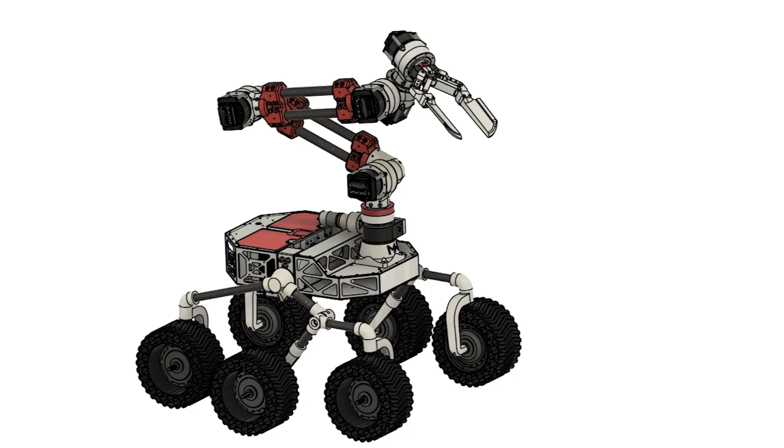Project MarsWorks was formed in 2017, attending competitions at the ERC in 2019 and the ARC in 2022. Our most recent project design cycle started in 2022 at the ARC, and we've been working for 3 years on our Scarab-1 rover. The Scarab-1 rover is a marvel at design and innovation from us at the University of Sheffield.

In 2017, the project was founded as Project MoonWorks. We looked to compete in the UK SEDS Lunar Rover competition. We came first for Best Innovation and second for Best Critical Design Review and Outreach.

In 2019, the team rebranded from Project MoonWorks to Project MarsWorks, and we made our first ever debut at the European Rover Challenge with 6 of the original MoonWorks members on board. Then COVID hit, and we didn't have access to our rover, so the team disbanded for the year. But we came back together in 2021 to make sure we could compete in the ARC 2022 competition.

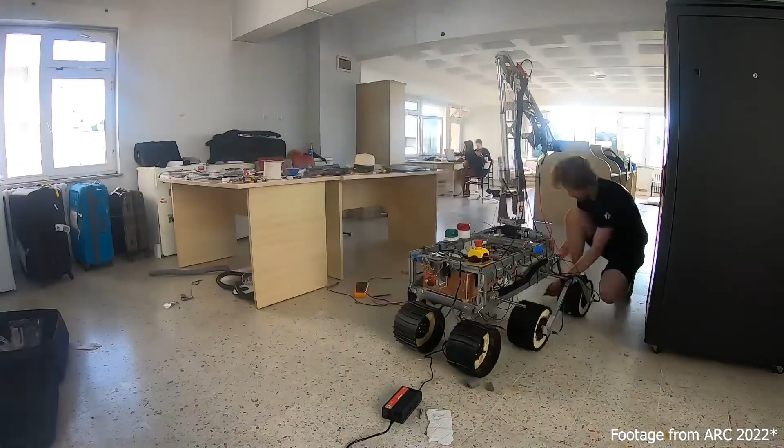In our team of over 50 members, we have a strict selection process for our astronaut training plan. We're looking for high meeting attendance, consistent, thorough project contributions. We're looking for good problem-solving skills with the adaptability and the ability to stay calm under pressure.

Once selected, each astronaut will undergo thorough training from all of our sub-team leads. This training will involve workshops, lectures, and meetings to go over the assembly process, subsystem design, priming for operation, and most importantly, failure modes and troubleshooting techniques. This will allow every astronaut to understand the rover completely and be prepared for any situation when getting the rover ready for all the challenges at the ARC.

As you can see here, we meet weekly at the Hicks building in room F20, where we discuss, overview, and look at every possible solution as a team to make the Scarab-1 the best rover it can be.

This is the George Porter building. As you can see, we have battery storage on the left here and waste disposal on the right. Going through these doors, each member has to sign in and out to ensure safety. We share this building with many other CCA teams, student-led projects. As you can see here, we share this room with another robotics team. This is where we have access to 3D printers, electronics equipment, nuts and bolts, and general assembly of the rover.

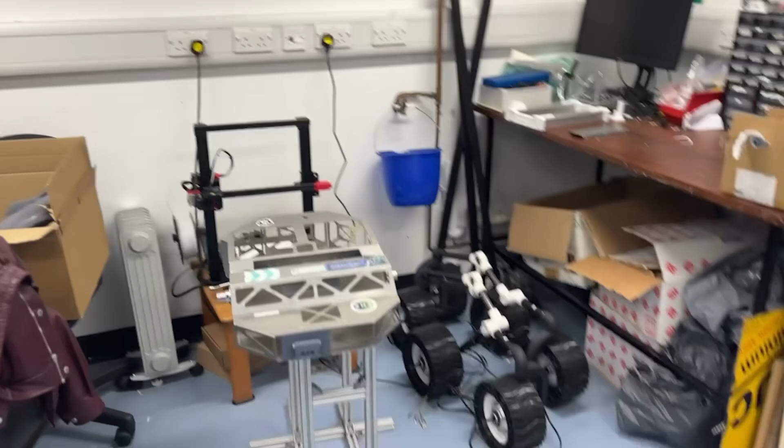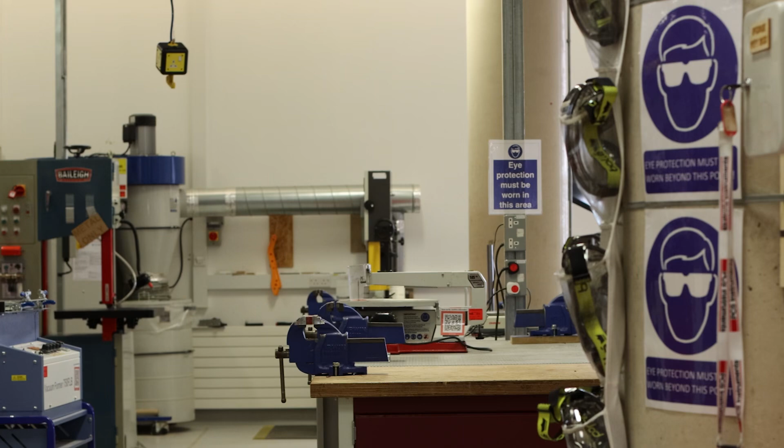This is the iForge. This is where the manufacture and machining of all our parts happens. In here, we have access to pillar drills, water jet cutters, laser cutters, mini mills, and many power tools, as well as more 3D printers and soldering equipment.

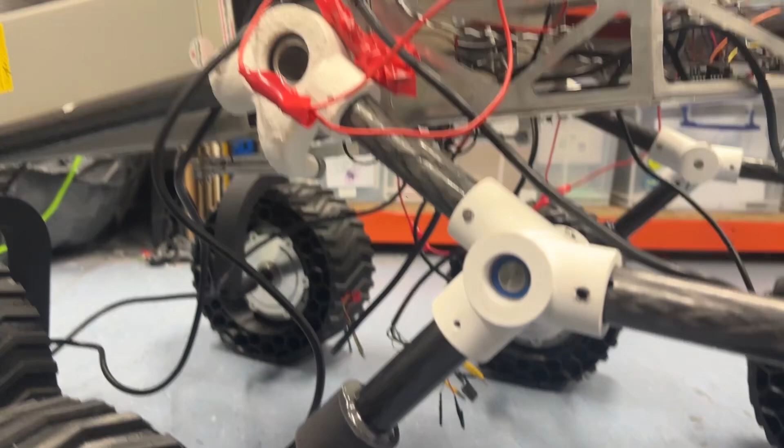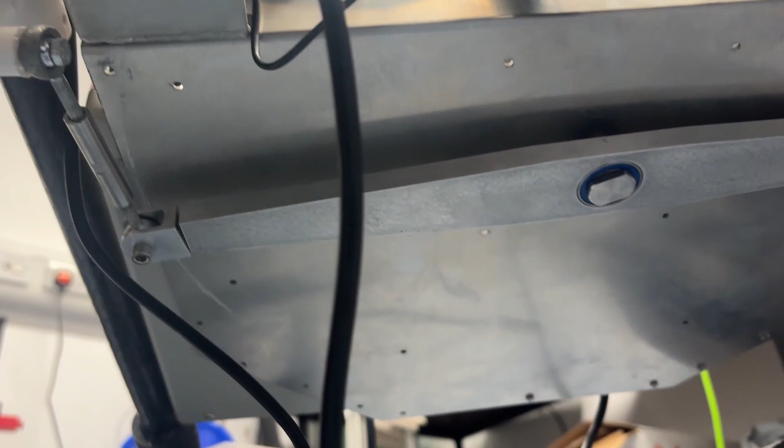The mobility system of the Scarab-1 features 6 independently powered e-bike motors driving TPU printed wheels. These e-bike motors have been internally welded to ensure the freewheel bearing is closed. It employs a rocker bogie suspension system where rocker arms are connected to bogie links and balanced by a differential bar. This ensures all wheels maintain ground contact on uneven terrain while keeping the chassis level. The system uses tank steering to allow forward motion, reversing, and turning.

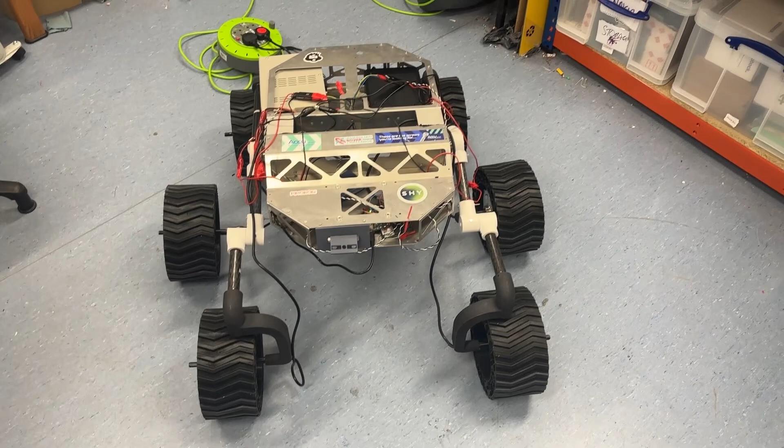With a total mass of 53 kilos and dimensions of 0.85 meters in width, 0.94 meters in length, and 0.5 meters in height, this design prioritizes stability and durability. Lightweight carbon fiber tubes and 3D printed PET-G connectors provide strength and keep weight low.

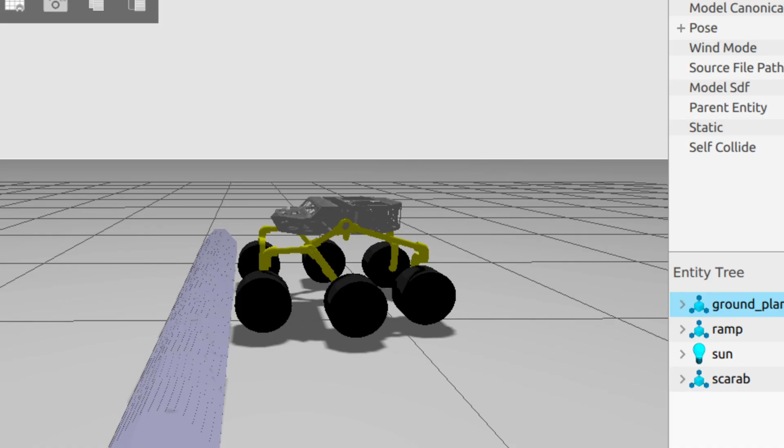Staggered wheel widths and over-wheel motor supports enhance stability and ensure the suspension is stable under a huge variety of scenarios. This robust design ensures reliable operation across challenging planetary surfaces, including steep gradients, craters, and large rocks, all to be expected when carrying out the ARC mission objectives.

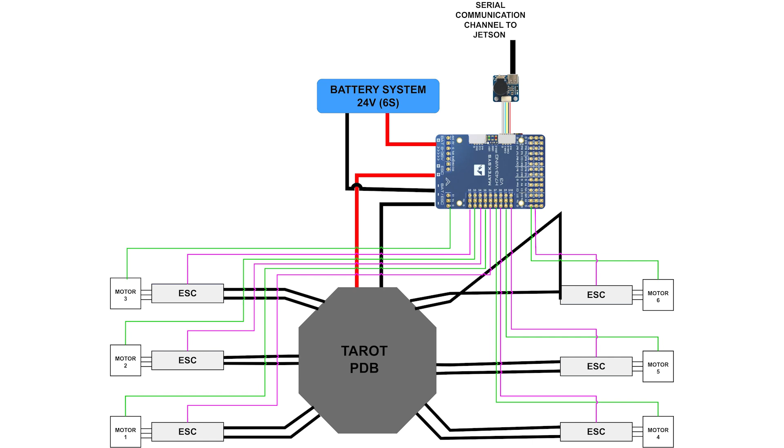The Scarab-1's electronic system is powered by 7 GNB 7000 mAh LiPo batteries with a combined theoretical runtime of 2 hours under full load. Each battery weighs approximately 800 grams. Power is distributed through a Tarot high current 480 amp power distribution board that supplies energy to the motors via the ESCs. Each ESC will be mounted to the chassis as an effective heat sink, and the entire chassis is connected to the system ground for a safe electrostatic discharge pathway.

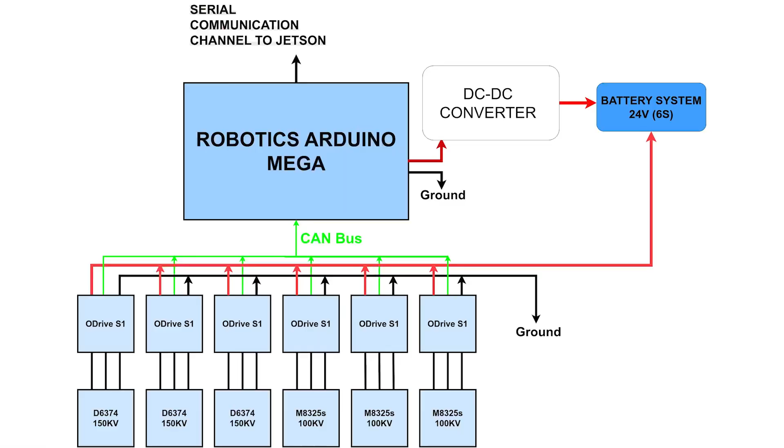The electronics architecture employs an NVIDIA Jetson Nano as the master controller, supported by Matek H743 Wing V3 flight controller and Arduino Mega boards as slave devices. The NVIDIA Jetson Nano provides 472 gigaflops of AI processing power with its quad-core CPU running at 1.43 GHz and a 128-core Maxwell GPU operating at 921 MHz.

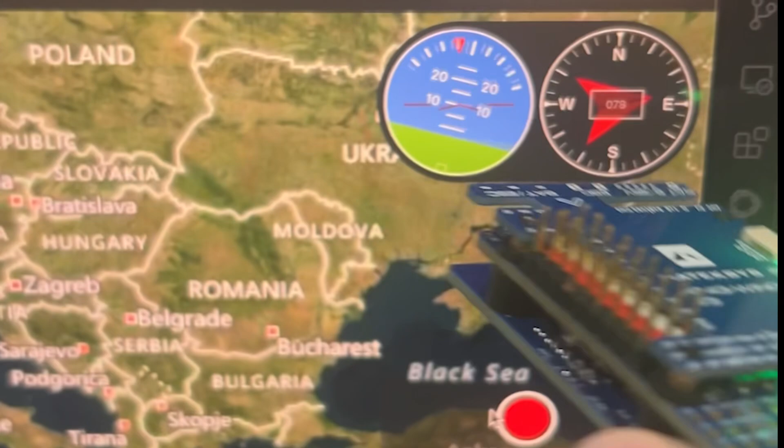This enables real-time processing for autonomous navigation and sensor integration. The Matek flight controller features an MCU running at 480 MHz with dual IMUs for precise motor control. It includes 7 UART ports, CAN bus support, and integrated battery monitoring.

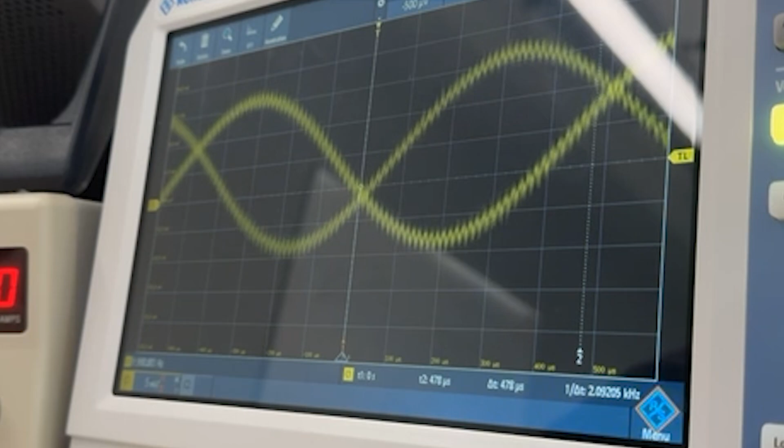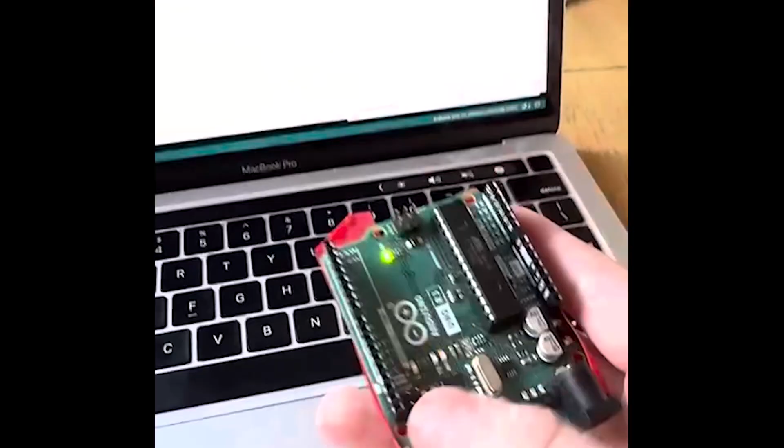This will be used in conjunction with the Jetson to control the speed of the rover. This is done via PWM signal control of our 6 ESCs to provide forward, reverse, and turn capability. To ensure modularity and ease of maintenance, the XT90 and XT60 connectors are used extensively for subsystem connections.

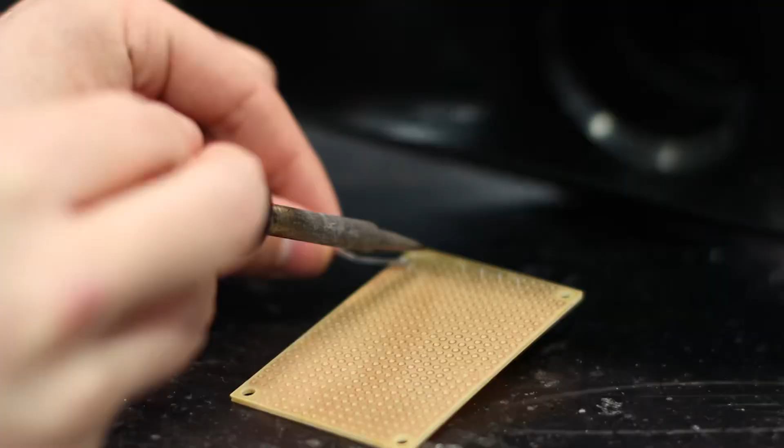Real-time battery monitoring provides critical data via telemetry to the ground station for operational safety. All supporting architecture, excluding the batteries, will come to just less than a kilogram. The combined theoretical runtime of the 7 batteries comes to a total of 2 hours, which gives us ample time to compete in even the longest mission in the ARC 2025.

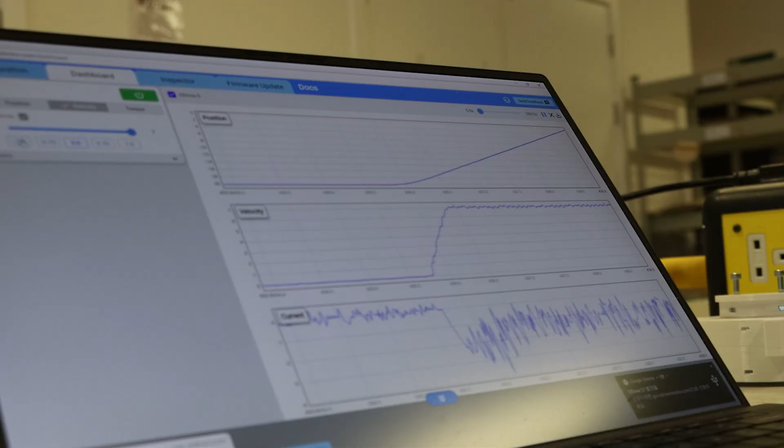The Scarab 1's manipulation system includes a modular 6-degree of freedom robotic arm powered by BLDC motors with ODrive S1 drivers. Each joint communicates via CAN bus for distributed control and easy maintenance. ROS2 integration with MoveIt2 enables real-time trajectory planning and inverse kinematics for precise operation.

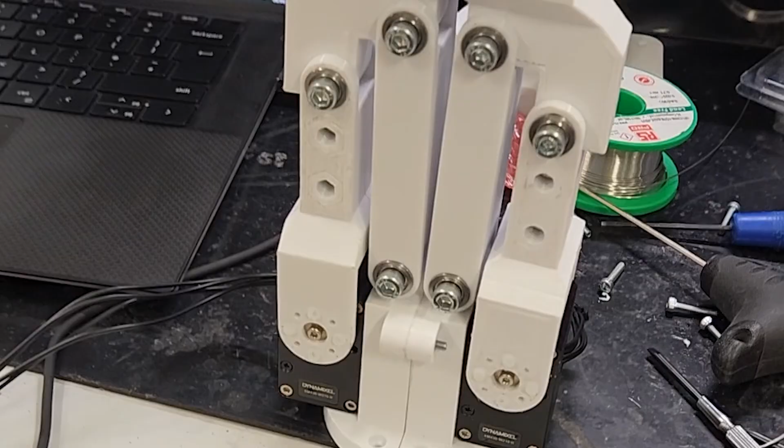The arm's custom-designed 64-to-1 roller wave gearbox delivers high torque at low cost while maintaining precision. At the end effector, Dynamixel actuators provide adaptable gripping capabilities with interchangeable fingertip modules. This modular design enhances maintainability and ensures adaptability for diverse mission tasks.

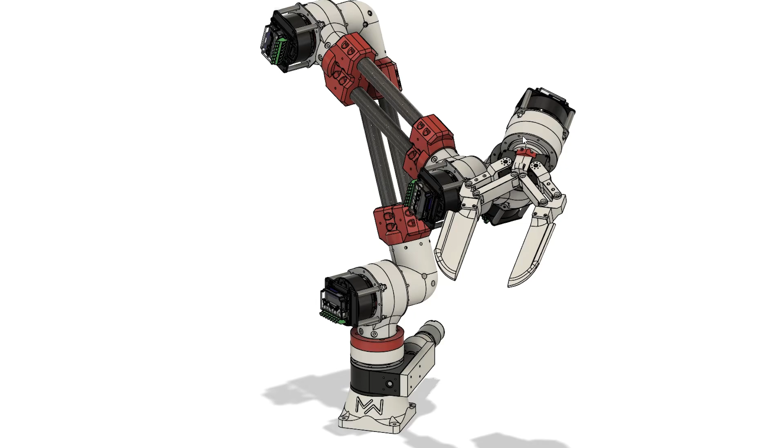This custom-made end effector outperformed the other design iterations in tests such as gripping and pulling, twisting and pushing. This ensures that the rover will be able to manipulate the environment around it and complete every task of the ARC 2025. For example, pulling the water ice subsurface extractor and manipulating the panel for the collaboration mission.

With a total reach of 1.2 meters and a foldaway height of around 50 centimeters, the total weight of the robotic arm is 12 kilos. The science payload features an auger drill sampling system mounted on the robotic arm to allow customizable sampling locations for optimal soil collection.

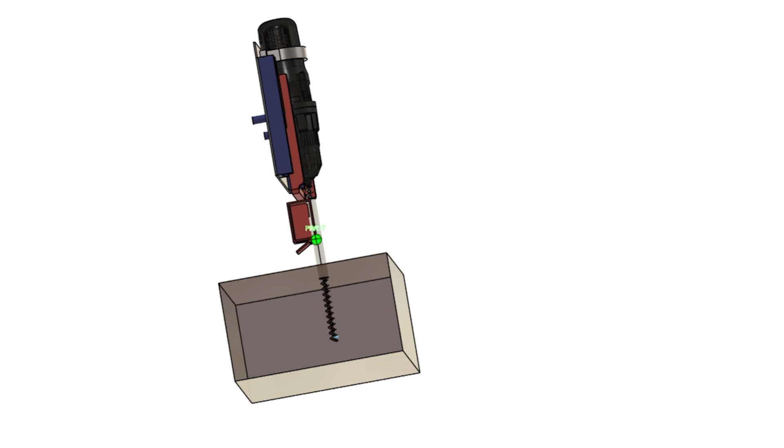The auger drill pulls samples through the sheath into a servo-controlled temporary sample box that discards the first 5 centimeters of soil to avoid contamination before depositing it into the dual science box. The auger drill can be seen here, pulling regolith up through the sheath, providing a sample. The use of the robotic arm allows multiple samples to be taken, ensuring a minimum of 5 grams of regolith is taken.

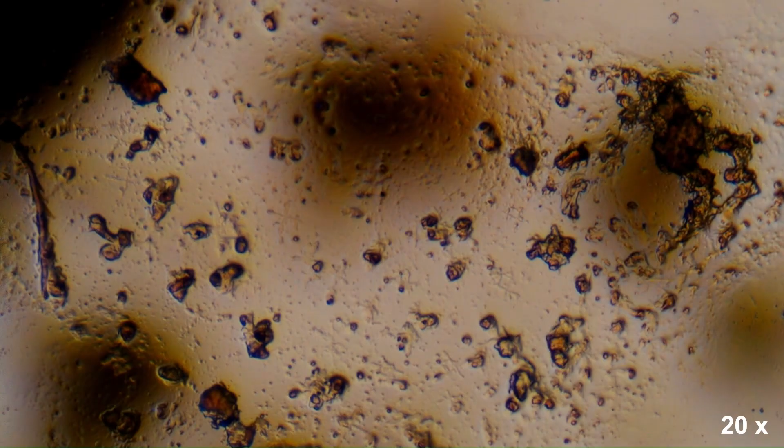Once collected, the soil is exposed to 465 nanometers blue light, which excites flavin adenine dinucleotide, FAD, a metabolic biomarker, causing autofluorescence at 530 nanometers. An onboard camera captures fluorescence data, which is processed using ImageJ software to quantify brightness and the area indicating microbial activity. Environmental sensors simultaneously measure CO2 levels, temperature, humidity, and soil moisture to contextualize microbial abundance.

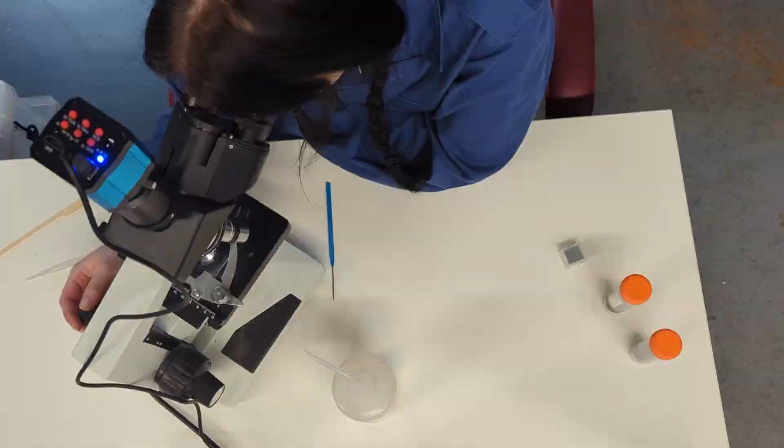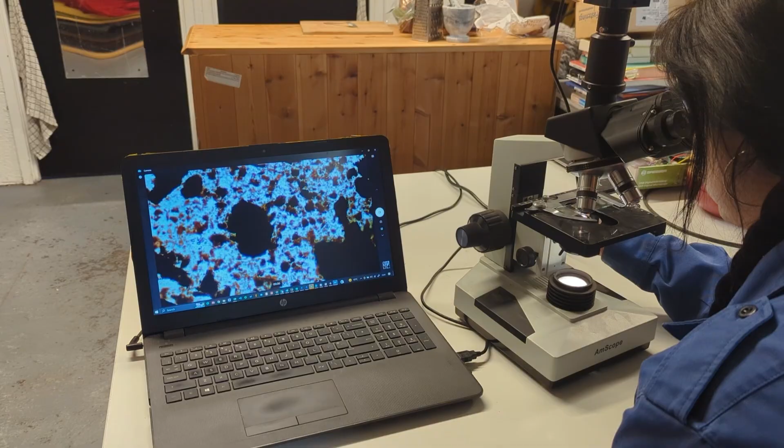Off-board tests include light microscopy and advanced staining techniques. Living microbes are analyzed using viable dyes like SYTO9, while microfossils and dead microbial life are visualized with DNA-binding dyes such as DAPI. These complementary onboard and off-board methods ensure that both metabolic activity and structural markers are thoroughly examined, providing insights into microbial life abundance and environmental factors influencing its presence.

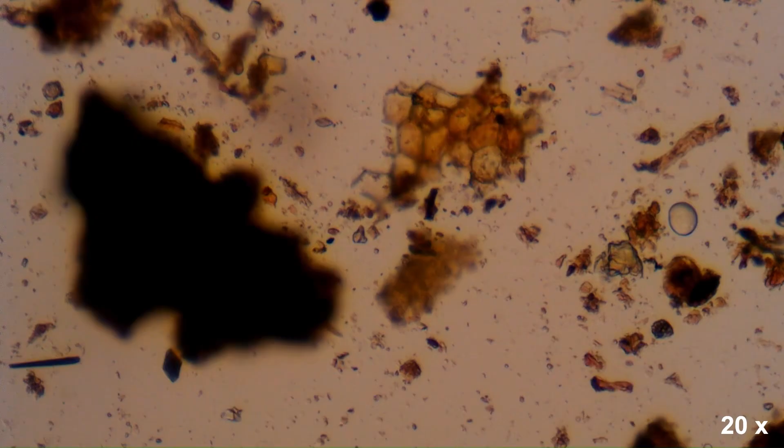The science box has a total weight of 800 grams and has the dimensions of 10 by 10 by 20 centimeters. The auger drill system will be around 40 centimeters long and weigh 1.5 kilograms. The base station to rover communication system utilizes a TP-Link EAP225 outdoor access point, providing dual-band Wi-Fi connectivity over distances of up to 300 meters at 5 gigahertz.

The on-rover subsystem communication is handled via CAN bus, Ethernet, USB ROS serial protocols, and MAVROS MAVLink frameworks. On the base station, a Qt-based GUI integrates with ROS Humble to centralize and visualize sensor data streams and enable teleoperation via joysticks or Xbox controllers.

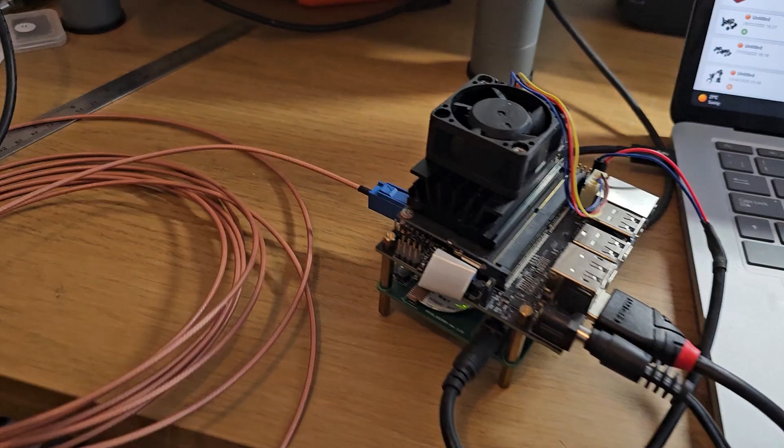This robust setup ensures seamless data transfer during missions while maintaining real-time feedback, allowing streamlined exploration of the entire ARC, Mars, and Moon simulated environments. The total mass of this system architecture is included in the electronics system total mass. Allowing connectivity over distances of 300 meters ensures we will stay connected to the rover at all points when exploring the terrain provided by the ARC.

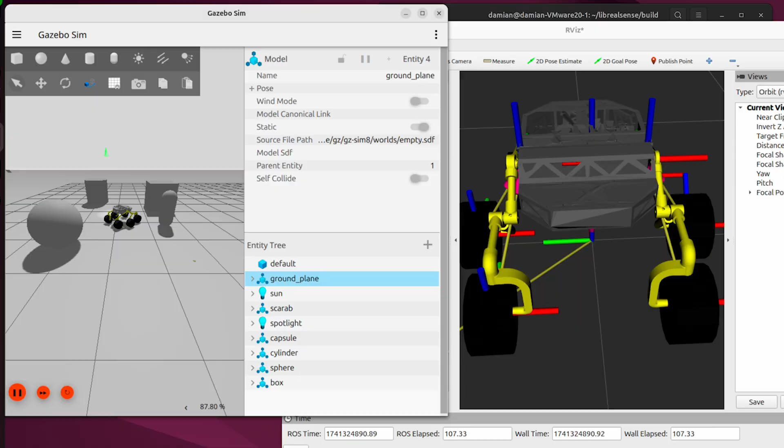The Scarab 1 combines ArduRover firmware with ROS2 for hybrid navigation capabilities. The Matek flight controller manages low-level motor control, while ROS2 Nav2 handles high-level path planning, obstacle avoidance, and waypoint generation using global planners like A-Star and behavior trees.